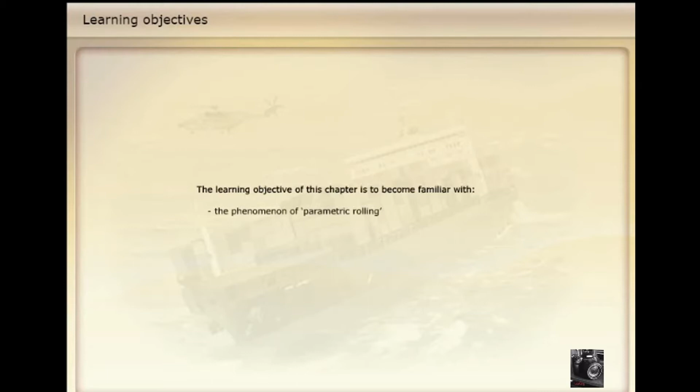The learning objective of this chapter is to become familiar with the phenomenon of parametric rolling, the effects of parametric rolling on container ships, and stability variations associated with parametric rolling.

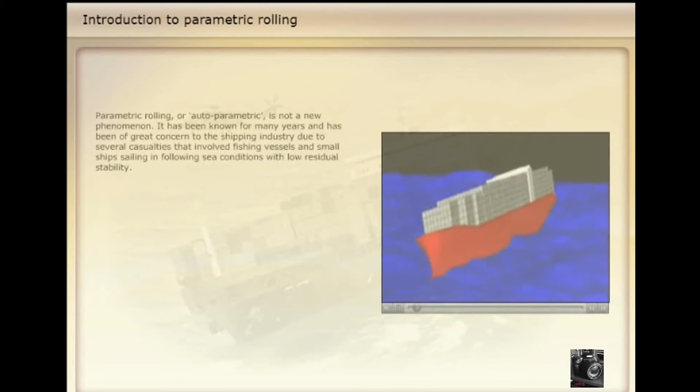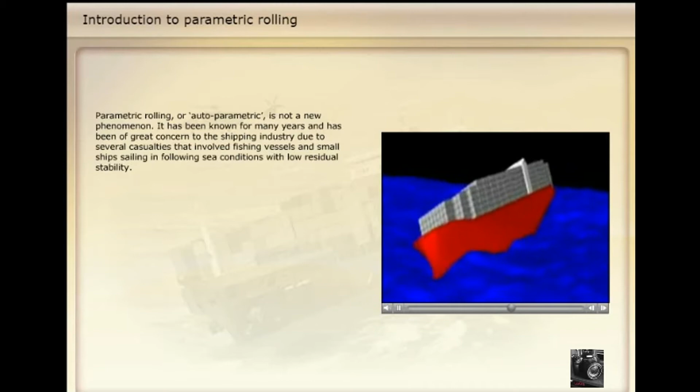Parametric rolling, or autoparametric rolling, is not a new phenomenon. It has been known for many years and has been of great concern to the shipping industry due to several casualties that involved fishing vessels and small ships sailing in following sea conditions with low residual stability. Due to the many casualties involving the effects of following seas on small ships, early concerns therefore focused only on following seas and low residual stability.

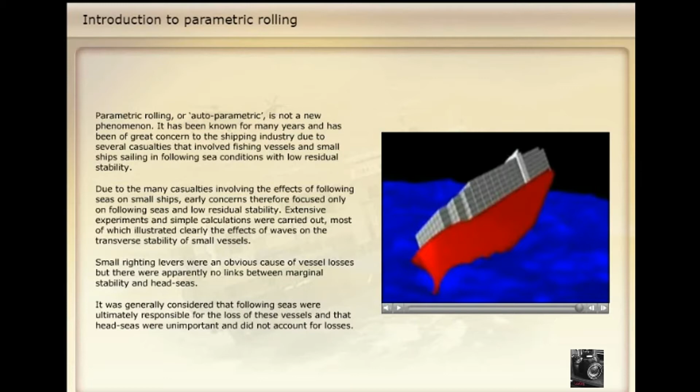Extensive experiments and simple calculations were carried out, most of which illustrated clearly the effects of waves on the transverse stability of small vessels. Small righting levers were an obvious cause of vessel losses, but there were apparently no links between marginal stability and head seas. It was generally considered that following seas were ultimately responsible for the loss of these vessels, and that head seas were unimportant and did not account for losses.

Today, parametric rolling is usually associated with large container ships. Basically, it is a dynamic, unstable phenomenon that affects ships with flared bows and wide, flat sterns.

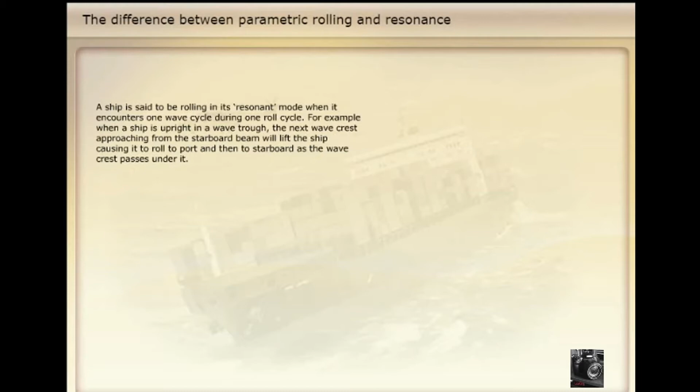A ship is said to be rolling in its resonant mode when it encounters one wave cycle during one roll cycle. For example, when a ship is upright in a wave trough, the next wave crest approaching from the starboard beam will lift the ship, causing it to roll to port and then to starboard as the wave crest passes under it.

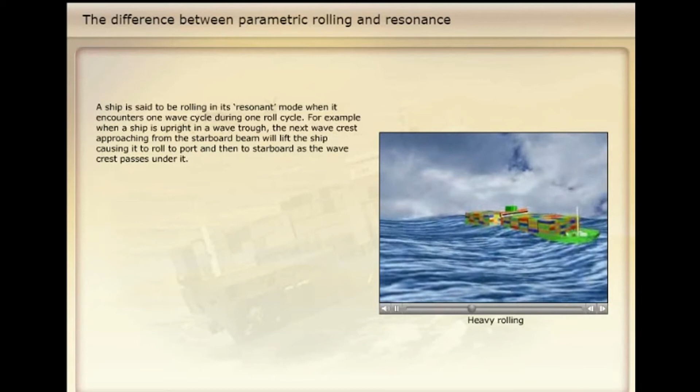In near-head seas, parametric rolling can occur due to the combination of certain unfavorable factors. The most important of these factors are low roll damping, caused by low speed below a certain limit for a particular ship form, and substantial variations in ship stability resulting from wave height, wavelength, the general hull form, bow flare, and a wide flat stern.

Bow flare is important because of the amount of righting energy introduced in this part of a ship when a wave crest has just passed under the amidships area. It is significant because at this instant a ship experiencing parametric rolling is returning from its maximum roll angle and is also pitched down by the head.

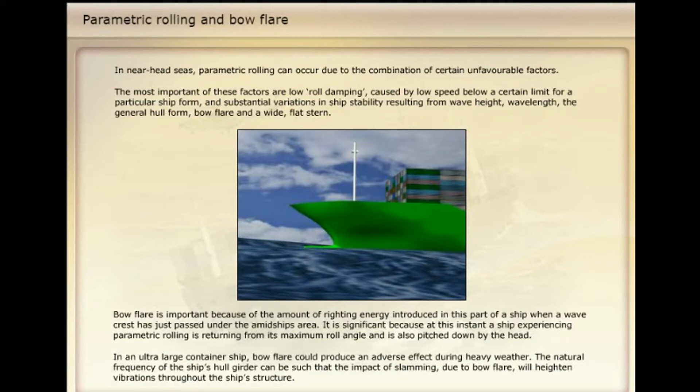In an ultra-large container ship, bow flare could produce an adverse effect during heavy weather. The natural frequency of the ship's hull girder can be such that the impact of slamming due to bow flare will heighten vibrations throughout the ship's structure.

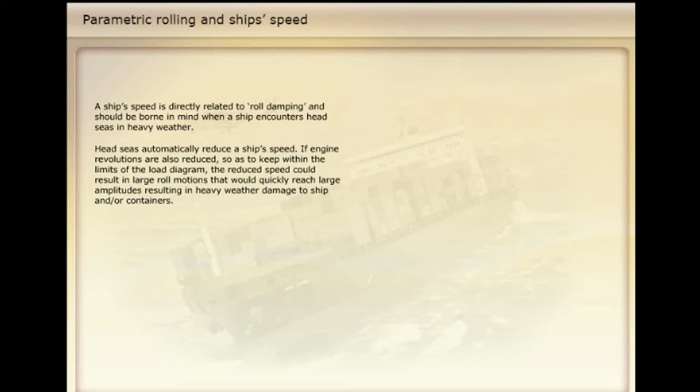A ship's speed is directly related to roll damping and should be borne in mind when a ship encounters head seas in heavy weather. Head seas automatically reduce a ship's speed. If engine revolutions are also reduced so as to keep within the limits of the load diagram, the reduced speed could result in large roll motions that would quickly reach large amplitudes, resulting in heavy weather damage to ship and/or containers. Depending upon the geometry of a particular ship, the lower the ship's speed, the larger the frequency of occurrence of parametric roll motions.

This phenomenon, however, can only be realized by the repeated experiences of a master aboard the same vessel. It is best to maintain sea speed and steer a course, preferably with the seas approaching from close to the beam, so that roll and pitch motions do not synchronize. Generally, with a sufficiently high speed, no large roll motions will occur.

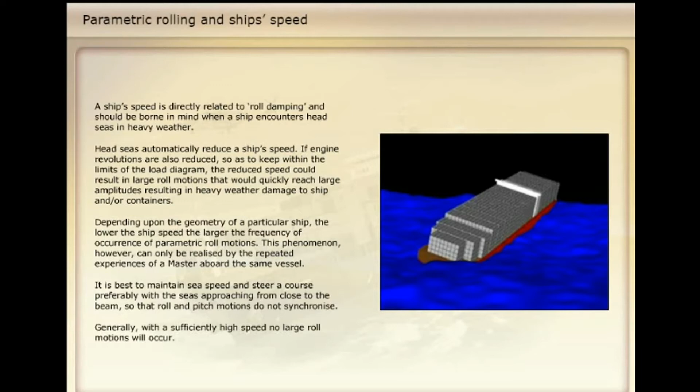This is an extreme case of heavy weather damage, in which the ship's motions, combined with the forces of the sea, resulted in twist lock and lashing rod failures and a heavy loss of containers overboard.

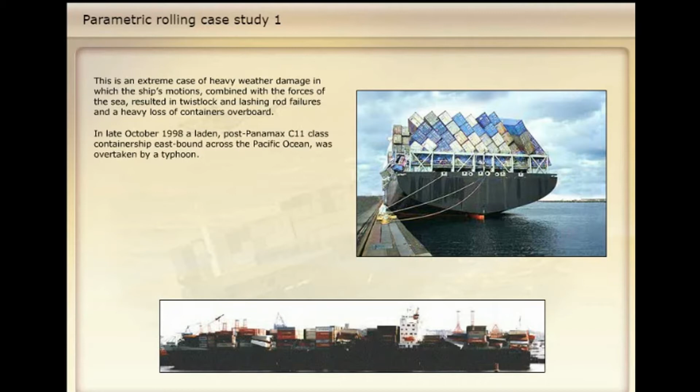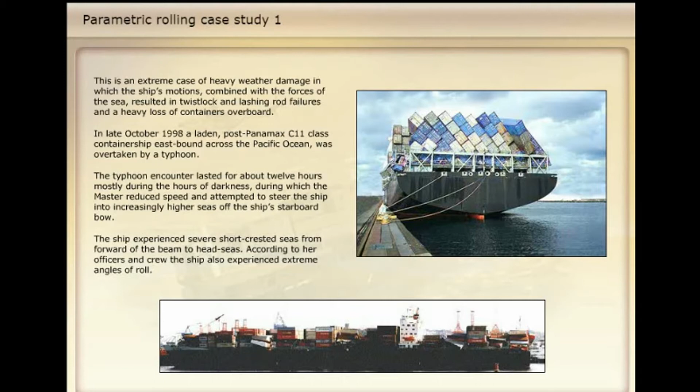In late October 1998, a laden post-Panamax C-11 class container ship eastbound across the Pacific Ocean was overtaken by a typhoon. The typhoon encounter lasted for about 12 hours, mostly during the hours of darkness, during which the master reduced speed and attempted to steer the ship into increasingly higher seas off the ship's starboard bow. The ship experienced severe short-crested seas from forward of the beam to head seas. According to her officers and crew, the ship also experienced extreme angles of roll.

Ultimately, the seas became completely confused and violent. Officers reported green water at bridge level during the worst of the typhoon and observed that container stacks immediately forward of the bridge had collapsed. Containers in the after bay were also believed to have collapsed when a container's corner casting punctured the main deck above the steering gear compartment, allowing ingress of seawater into that compartment.

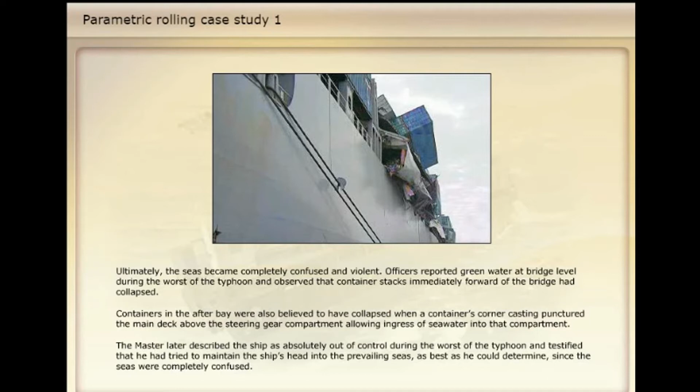The master later described the ship as absolutely out of control during the worst of the typhoon, and testified that he had tried to maintain the ship's head into the prevailing seas as best he could determine, since the seas were completely confused.

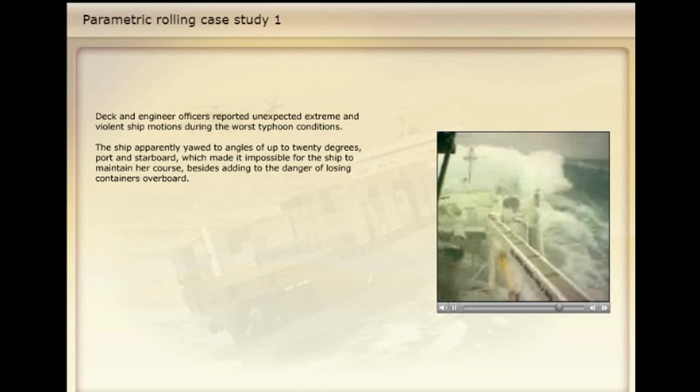Deck and engineer officers reported unexpected, extreme and violent ship motions during the worst typhoon conditions. The ship apparently yawed to angles of up to 20 degrees, port and starboard, which made it impossible for the ship to maintain her course, besides adding to the danger of losing containers overboard.

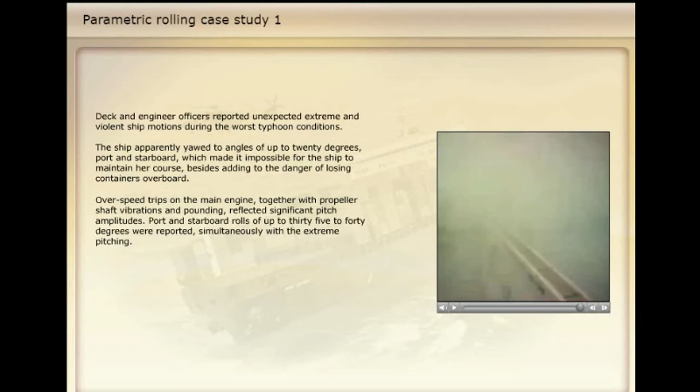Overspeed trips on the main engine, together with propeller shaft vibrations and pounding, reflected significant pitch amplitudes. Port and starboard rolls of up to 35 to 40 degrees were reported, simultaneously with the extreme pitching.

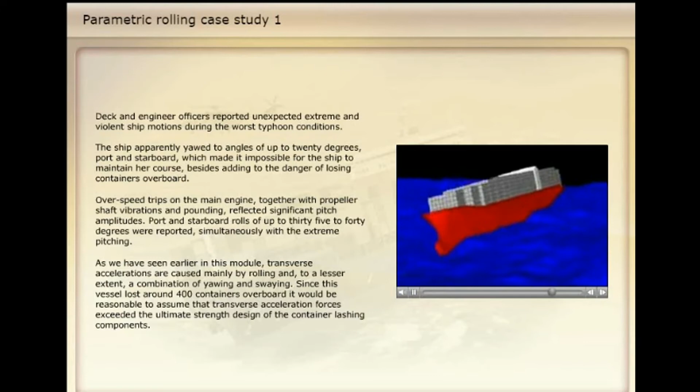As we have seen earlier in this module, transverse accelerations are caused mainly by rolling and, to a lesser extent, a combination of yawing and swaying. Since this vessel lost around 400 containers overboard, it would be reasonable to assume that transverse acceleration forces exceeded the ultimate strength design of the container lashing components.

The following morning it was found that of the 1,300 containers on deck, almost one-third had been lost overboard, and another one-third had been variously damaged. Containers and cargoes hung over both sides of the ship.

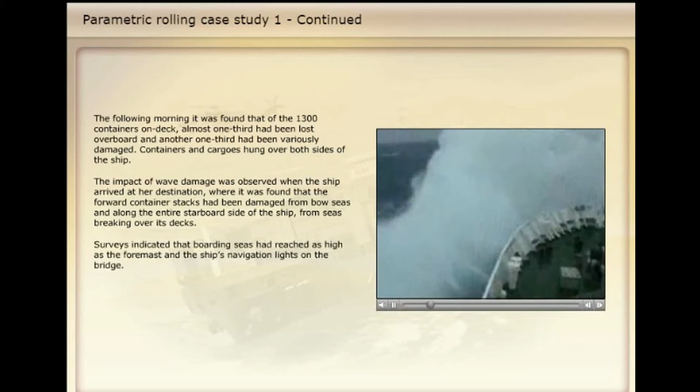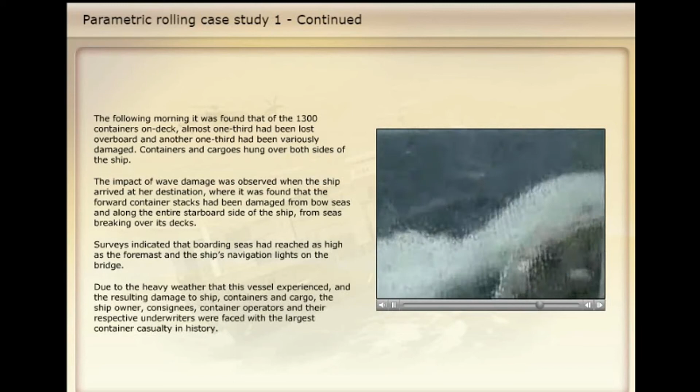The impact of wave damage was observed when the ship arrived at her destination, where it was found that the forward container stacks had been damaged from bow seas and along the entire starboard side of the ship from seas breaking over its decks. Surveys indicated that boarding seas had reached as high as the foremast and the ship's navigation lights on the bridge.

Due to the heavy weather that this vessel experienced and the resulting damage to ship, containers and cargo, the ship owner, consignees, container operators and their respective underwriters were faced with the largest container casualty in history.

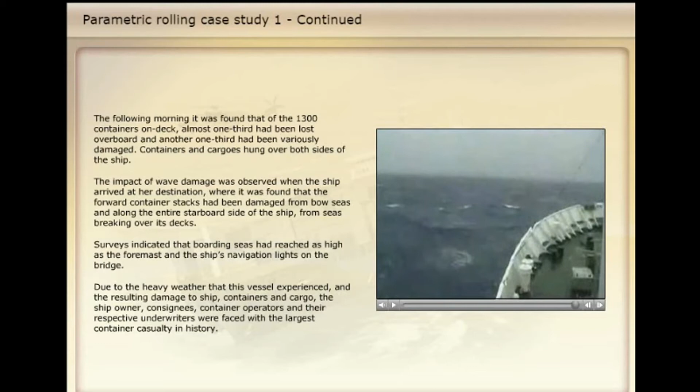C-11 class ships are second-generation post-Panamax container ships and have typical dimensions of 262 meters length, 40 meters breadth and 24.45 meters depth, on a maximum summer draft of 14 meters.

At the time of the incident, the ship's mean draft was 12.34 meters, with a corresponding freeboard of slightly more than 12 meters. Prior to the casualty, the ship's GM was approximately 2 meters, giving her a natural roll period of 25.7 seconds.

With respect to the case study, the master attempted to heave to, or head the ship into the waves at reduced speed during the period of encounter with the typhoon.

Based on studies that were completed after the incident, the wave height during the period ranged somewhere between 11 and 15 meters, and the peak wave period ranged somewhere between 13 and 16 seconds.

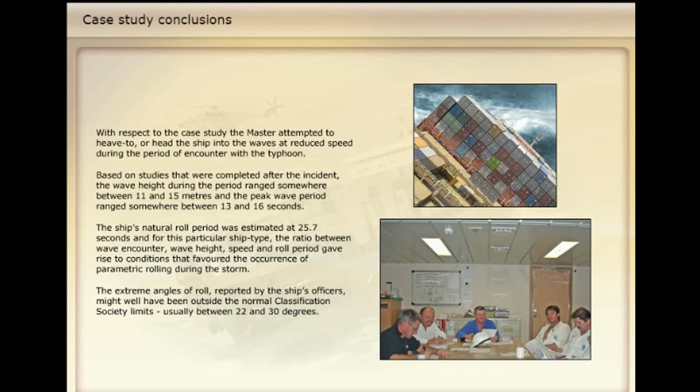The ship's natural roll period was estimated at 25.7 seconds, and for this particular ship type, the ratio between wave encounter, wave height, speed and roll period gave rise to conditions that favored the occurrence of parametric rolling during the storm. The extreme angles of roll reported by the ship's officers might well have been outside the normal classification society limits, usually between 22 and 30 degrees.

One of the lessons you will learn from this case study will be to heed the advice given to every newcomer on board a particular ship, which is to know your ship.

This ship was designed with a flat transom and large bow flare, which made her vulnerable to the effects of swell approaching from right ahead to approximately 35 degrees on each bow.

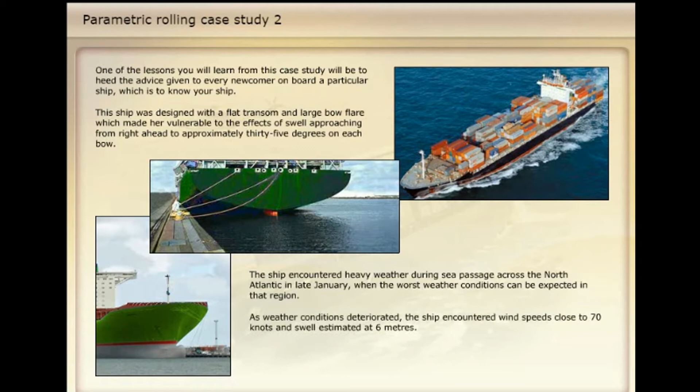The ship encountered heavy weather during sea passage across the North Atlantic in late January, when the worst weather conditions can be expected in that region. As weather conditions deteriorated, the ship encountered wind speeds close to 70 knots, and swell estimated at 6 meters.

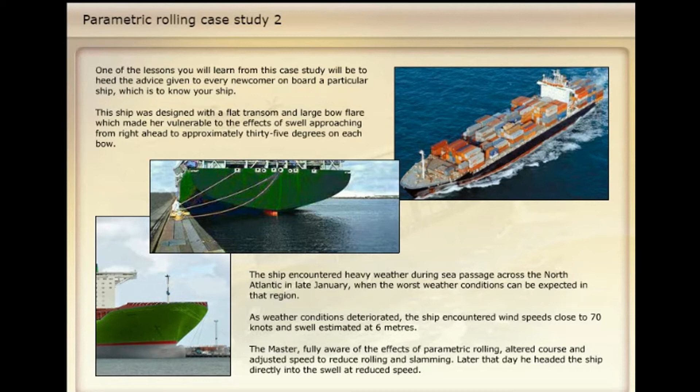The master, fully aware of the effects of parametric rolling, altered course and adjusted speed to reduce rolling and slamming. Later that day, he headed the ship directly into the swell at reduced speed.

In order to stop any increase in pitching, the ship's speed over the ground was reduced to around 4.8 knots, and although the ship was headed almost into the swell, larger and longer waves approached from the bows. The vessel's roll was increasing, although there was no increase in the height of swell.

Wavelengths were almost equal to the ship's length. During this period, it is possible that the ship's bows and stern rested on successive wave crests, with the amidships area in the wave trough.

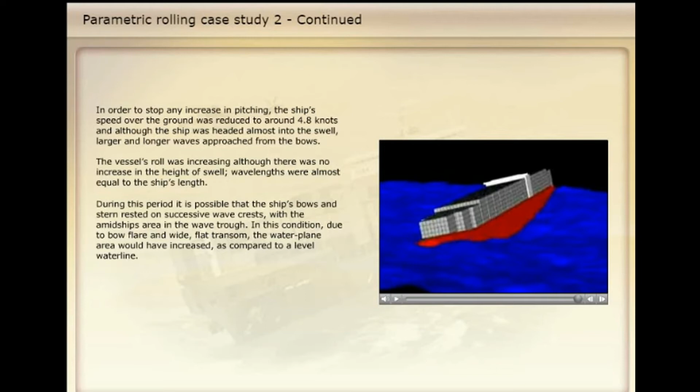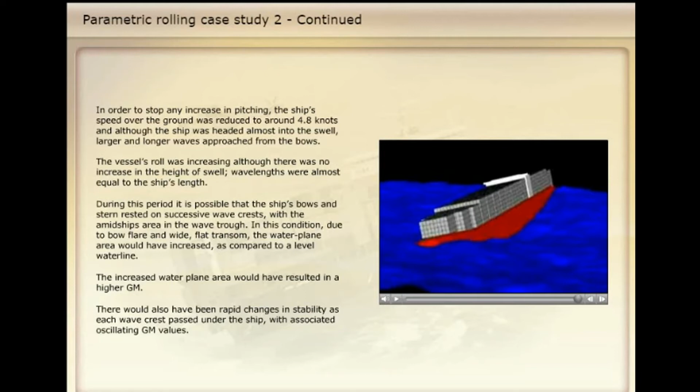In this condition, due to bow flare and wide flat transom, the waterplane area would have increased as compared to a level waterline. The increased waterplane area would have resulted in a higher GM. There would also have been rapid changes in stability as each wave crest passed under the ship, with associated oscillating GM values.

During the afternoon watch, the master decided to head the ship due south, directly into the swell, in an attempt to reduce the possible onset of parametric rolling.

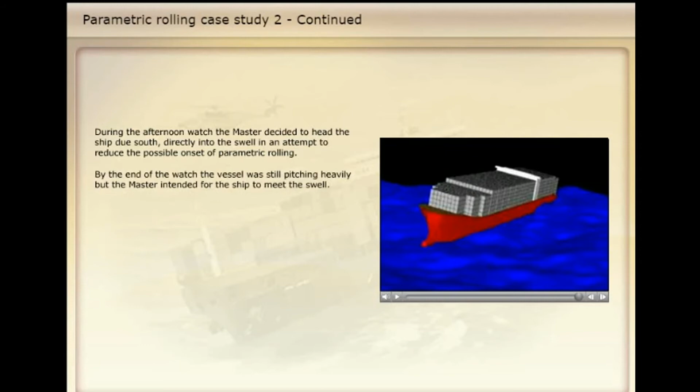By the end of the watch, the vessel was still pitching heavily, but the master intended for the ship to meet the swell. Early during the evening watch, the fluid GM was increased to around 1.13 meters, shortly after which the ship took a number of large consecutive rolls, reportedly up to 30 degrees.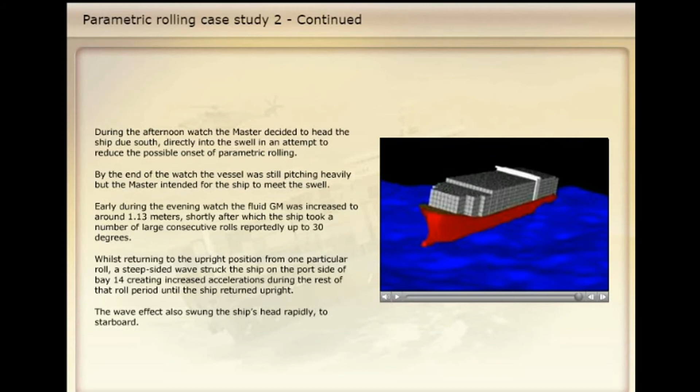Whilst returning to the upright position from one particular roll, a steep-sided wave struck the ship on the port side of Bay 14, creating increased accelerations during the rest of that roll period until the ship returned upright. The wave effect also swung the ship's head rapidly to starboard.

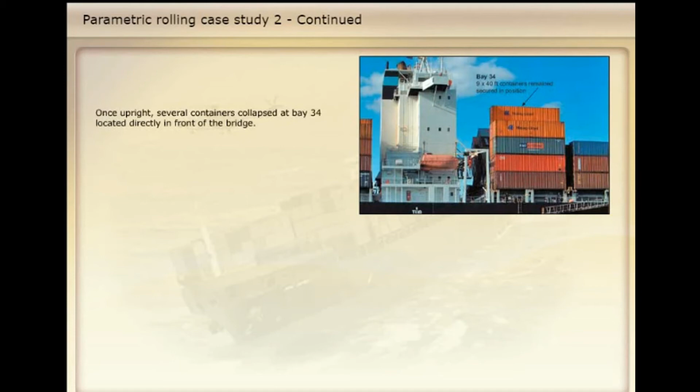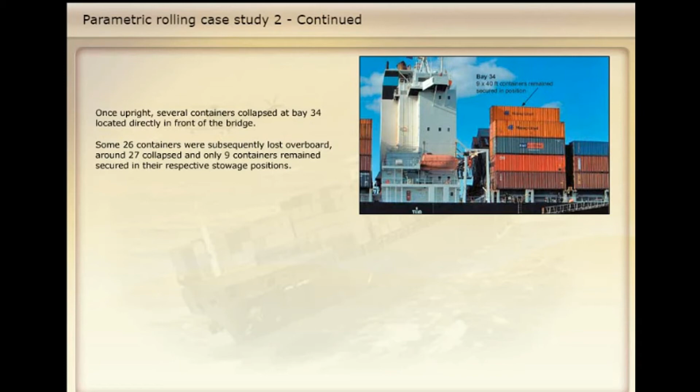Once upright, several containers collapsed at Bay 34, located directly in front of the bridge. Some 26 containers were subsequently lost overboard. Around 27 collapsed, and only 9 containers remained secured in their respective stowage positions.

Lashings on the affected containers at Bay 34 were completely destroyed. Semi-automatic twist locks had broken, and the lashing rods had parted. Containers had compressed, with several container corner castings ripped open.

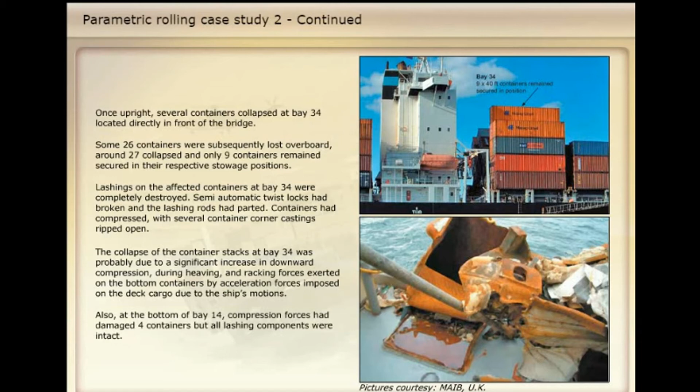The collapse of the container stacks at Bay 34 was probably due to a significant increase in downward compression during heaving and racking forces exerted on the bottom containers by acceleration forces imposed on the deck cargo due to the ship's motions. Also, at the bottom of Bay 14, compression forces had damaged 4 containers, but all lashing components were intact.

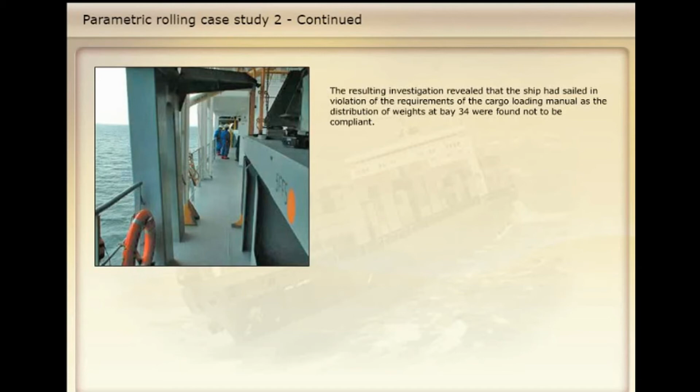The resulting investigation revealed that the ship had sailed in violation of the requirements of the cargo loading manual, as the distribution of weights at Bay 34 was found not to be compliant.

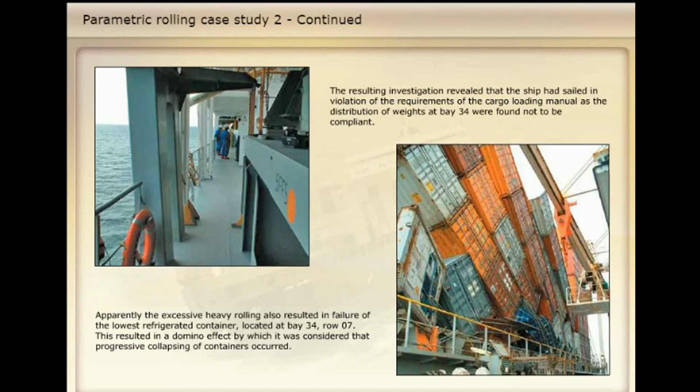Apparently, the excessive heavy rolling also resulted in failure of the lowest refrigerated container, located at Bay 34, row 07. This resulted in a domino effect, by which it was considered that progressive collapsing of containers occurred.

Let us now consider a scenario in which a container ship with a wide flat stern and pronounced flared bows starts fulfilling the following criteria.

A. The ship is meeting head seas or nearly head seas, or is running with the seas from astern or fine on the quarter, together with B. Rolling naturally with a roll period estimated at, say, 18.5 seconds, together with C. The ship meeting successive peak waves at regular intervals ranging between, say, 9.5 and 11 seconds.

The officer of the watch should be alert to the fact that his ship is heading into danger and that parametric rolling is very likely to occur.

The purpose of choosing imaginary figures for the ship's natural roll period and period of wave encounter is purely to highlight that a watchkeeping officer should be alerted to the fact that his ship's natural roll period is close to twice that of the period of wave encounter, and that his ship is rolling in the absence of beam seas.

A transversely symmetrical ship moving in pure head or following long-crested seas will pitch, heave and surge, but will not experience transverse rolling. However, under certain conditions of wave encounter, rolling can be induced.

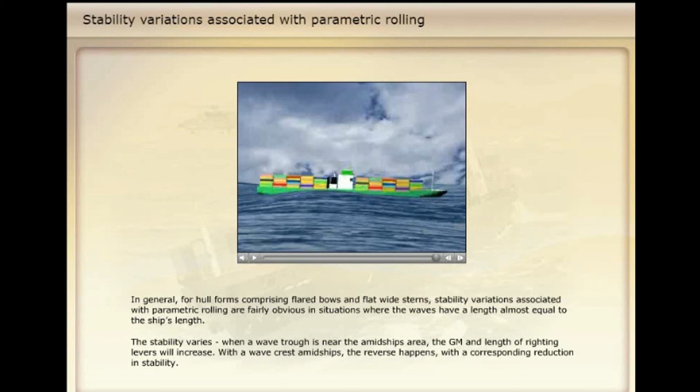When the flared bow section and the flat wide stern section of a large container ship are both submerged in 2 successive wave crests, with a corresponding wave trough amidships, the ship's waterplane is generally wider than it was when the ship was at rest in still water. At this instant, the GM and righting moments increase as compared to the ship lying in calm waters. The increase in righting moments is generally due to the waterline coming up to the flared bows and the wide flat stern.

With a wave crest amidships and the corresponding troughs under the bows and stern, the waterline width amidships will remain unchanged due to the ship's parallel body. However, due to the significantly reduced waterline width at the bows and stern and corresponding smaller waterplane areas, the GM and righting moments will decrease.

It should be appreciated that when waves whose lengths are roughly equal to the length of a ship pass under the ship, the righting arm levers will constantly change in relation to the ship's changing waterplane areas. There will therefore be variations in the ship's stability that may lead to parametric rolling, in which the restoring moments, or righting levers, will not only be a function of the angle of heel, but will also be a function that varies with the passage of time, the period of wave encounter.

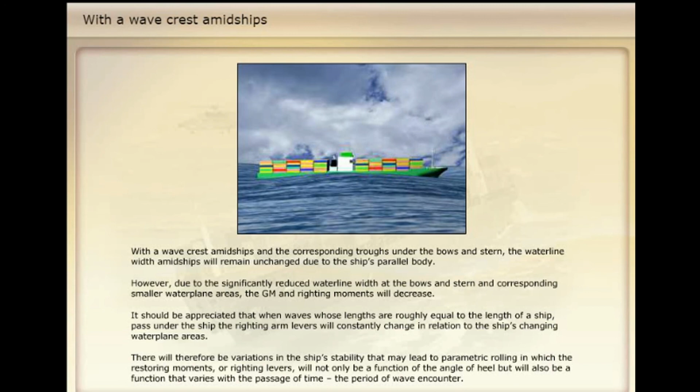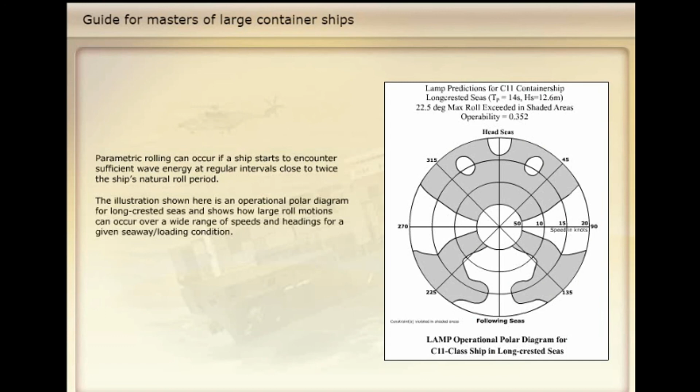Parametric rolling can occur if a ship starts to encounter sufficient wave energy at regular intervals close to twice the ship's natural roll period. The illustration shown here is an operational polar diagram for long crested seas and shows how large roll motions can occur over a wide range of speeds and headings for a given seaway or loading condition. This type of diagram can be useful in helping to avoid parametric rolling while a ship is operating in severe sea conditions. It can also further the level of understanding of susceptibility to this phenomenon for a given hull form.